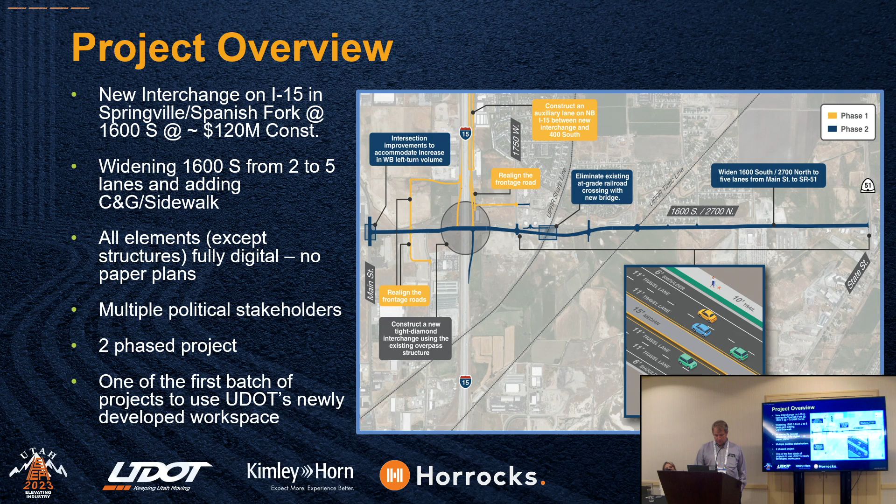So there was a little bit of risk in doing something new on such a big project, with a lot of different stakeholders involved. Let me see if this is going to kick off.

One of the things we implemented on this project was a full digital model. We had RDV Systems put this together for us, and it was very useful. Is this going northbound?

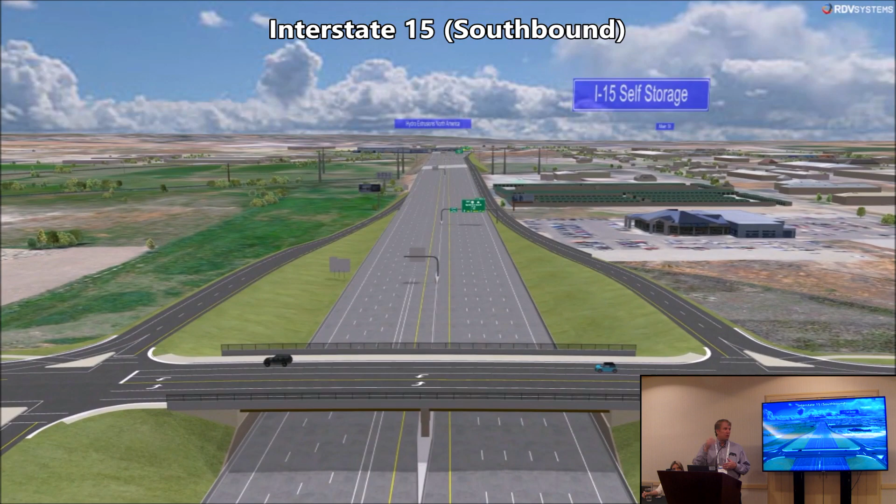There was a pretty well-established nickel arcade over here with a billboard sign. One of the things they wanted to make sure of with the project is that when we relocated the billboard sign, it would still be visible with the ramps and everything. We were able to use this model to take this to the landowner and show them exactly what that billboard would look like from a 3D perspective from the road, and get buy-off on moving that billboard. That was a big deal on this project.

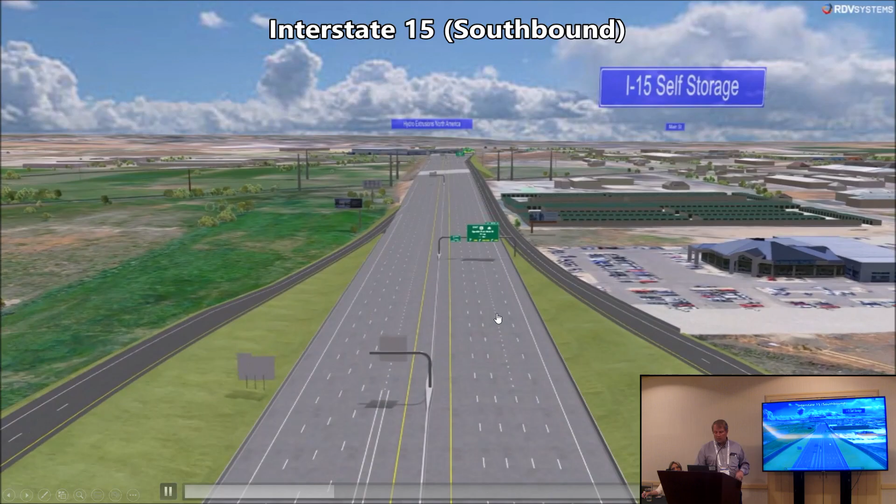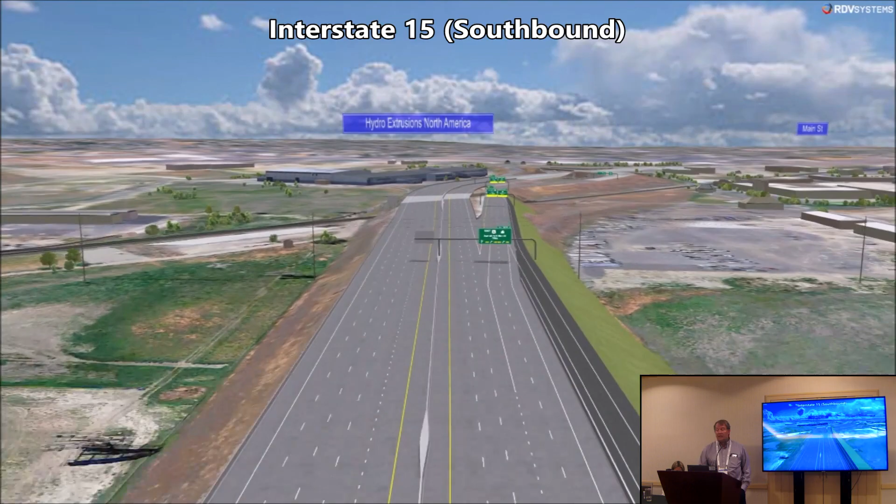We have multiple third parties on this project, lots of utility companies. This corridor has 6 power companies, including the BOR. I don't know if there's another BOR electrical facility in the state. That was a unique challenge in that the BOR didn't even have right-of-way because it was so old that it was prescriptive right-of-way. So one of the challenges was trying to get to move that.

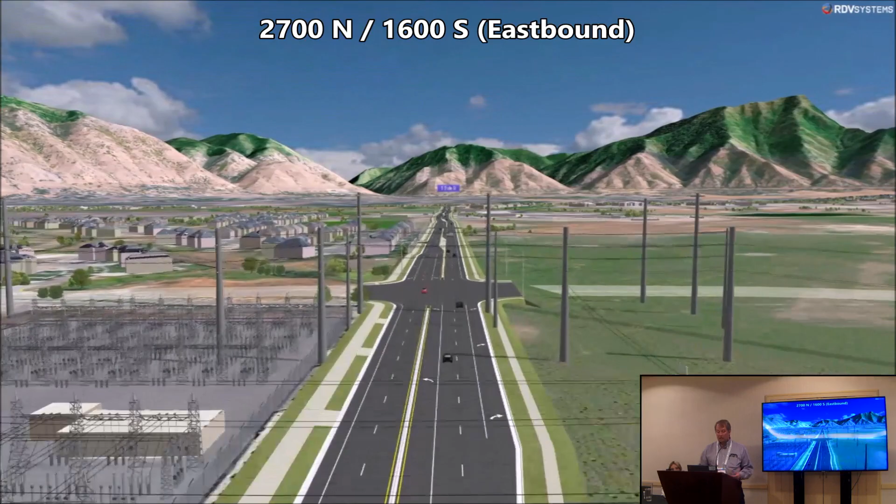So in regards to digital delivery, how do you communicate with all these third parties without plan sets? We're going to be talking about that today. We also had to coordinate with Springville, Spanish Fork, and UTA on this project.

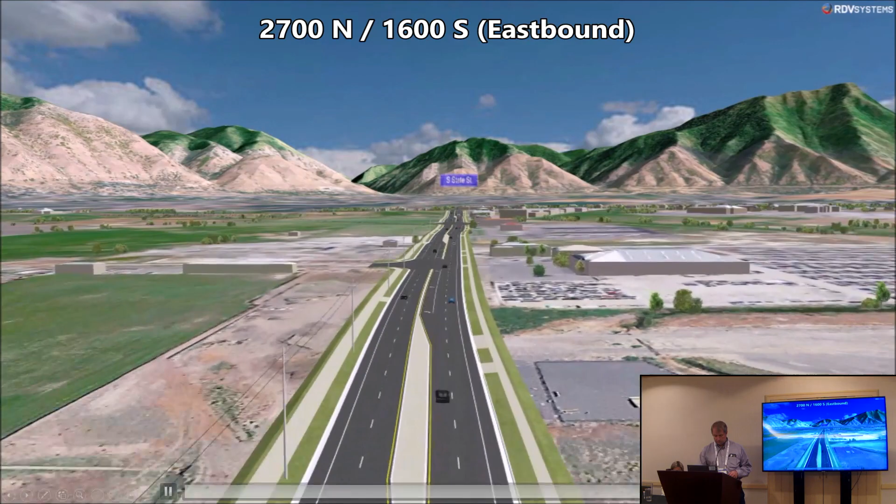One of the important things about this particular digital delivery project is we actually got the UDOT design team involved in doing digital delivery as well, and so they were able to gain experience. With the standards that Ariel and her group and Nicole and her team have put in place, it allowed our team to do a digital delivery project, even though a lot of these teams never had digital delivery experience before. That's one of the unique things on this project, is that it wasn't just comprised of people that already knew digital delivery. There were a lot of newcomers to this process on this project.

Okay, so we're going to jump into some of the unique aspects of this project. This was a hybrid project. What that means is that parts of the project were digital delivery, and some of the parts of the project were traditional delivery.

Because of the unique characteristics of structures, we did the structures plans traditionally. So we created a plan set for structures. All the rest of it we did electronically just through the model.

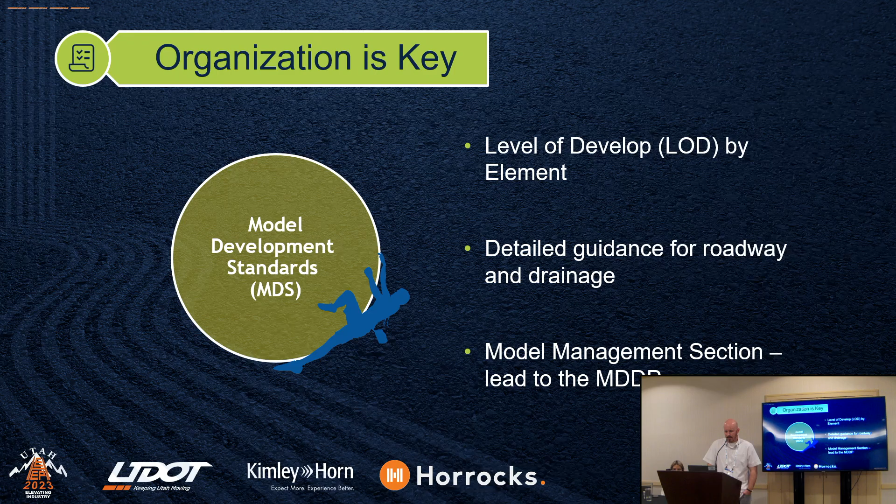And then our model development plan outlined roles and responsibilities, who's doing what, filled out some structure in the organization. We set up some recurring task force meetings specific to digital delivery. The UDOT folks developing this were highly interested in what's working, what's not working on a regular basis. How do we update the workspace for what you need? So they were valuable meetings, just had leads from each team on the project come and report and discuss and coordinate.

I think we were able to track a lot of the feedback, and get a lot of progression and evolution in this process for UDOT through that task force.

Moving on to design details and some of the unique aspects for this project, some challenges we saw. I think with digital delivery, you're going to want to be flexible in what your outcomes are and know who your audience is. That's been a common theme in these meetings.

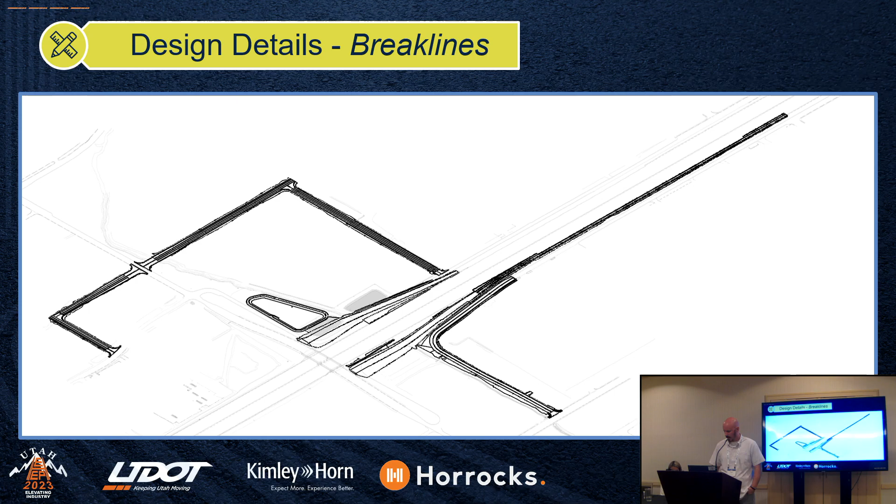The first thing that's helpful with break lines is to standardize your point name conventions for all your break lines. UDOT has a standard for how to name them so that it's familiar for all contractors. Each project, they see the same type of naming convention, and that makes it easy to create your finish grade, subgrade surfaces, whatever you need - just filter by those points. Anything unique to the project, we created a detail to outline what that naming was, so they knew what it represented in their model.

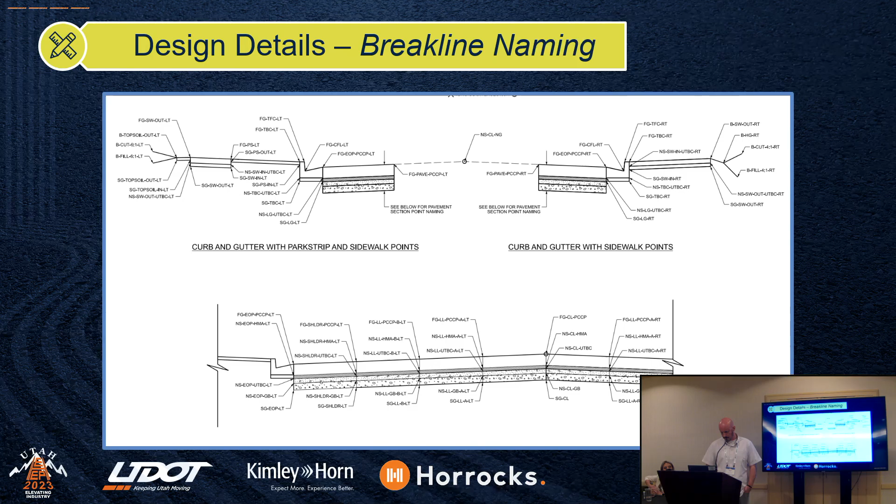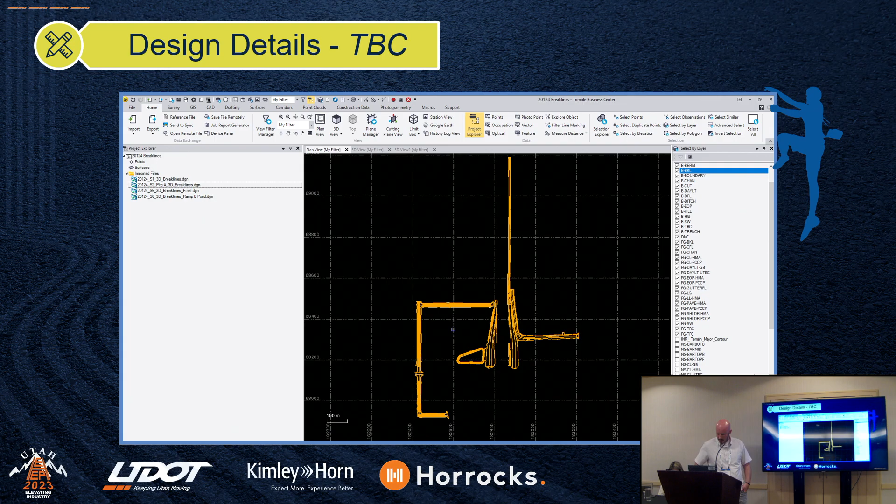Another tool we used is we took our DGN break line files and created terrains, brought them into Trimble Business Center, a tool that most contractors use for their machine guidance. You can see all of the naming for the break lines off to the side, filter them down, and run the report in Trimble Business Center that helps you hone in on gaps and overlaps and fine-tune those break lines to be usable for the contractors. That was a step in our QC to make sure all the loose ends were buttoned up and that the model was pretty tight.

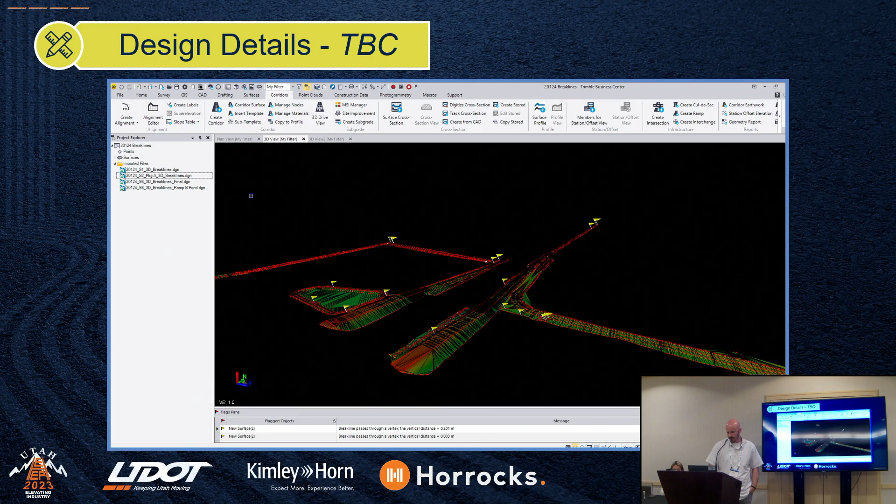So this data is in the element itself. We also annotated it to help contractors if they needed to share it with subs or whoever, to be able to create PDFs quickly or whatever they wanted to use it for. Once the metadata is in these elements, it's easy to query and generate reports and track payment and all that.

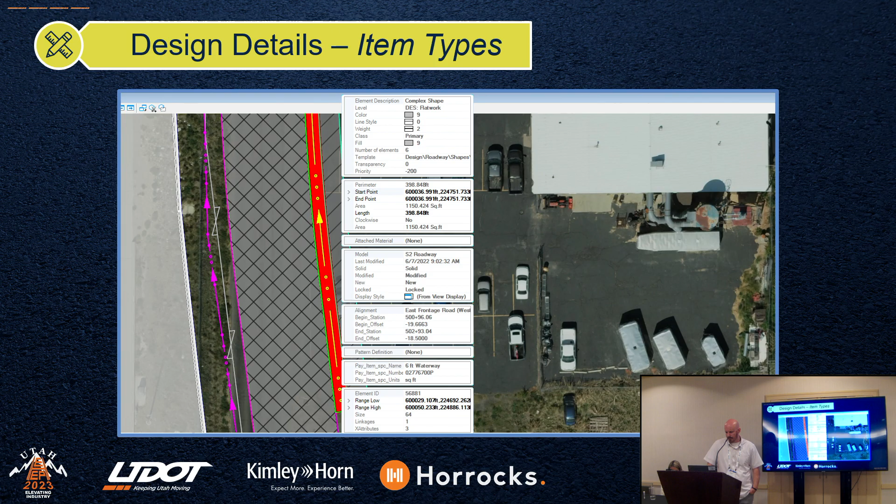Another piece of this that we were trying to anticipate - we broke the project into two phases. The first phase is advertised right now, so we're waiting for bids, and the second phase will go out next year. We were trying to anticipate what our inspection staff is going to need. The contractor's going to have a DGN, they're going to have their model they can use for machine guidance, but how's the contractor, or how's the inspection team, going to verify that it's built correctly?

An example is side treatments. We felt like we would give the inspection team and the contractor, for information only, all of our side treatments to show what the grading and tie-ins needed to look like. So we created those as a PDF for information only.

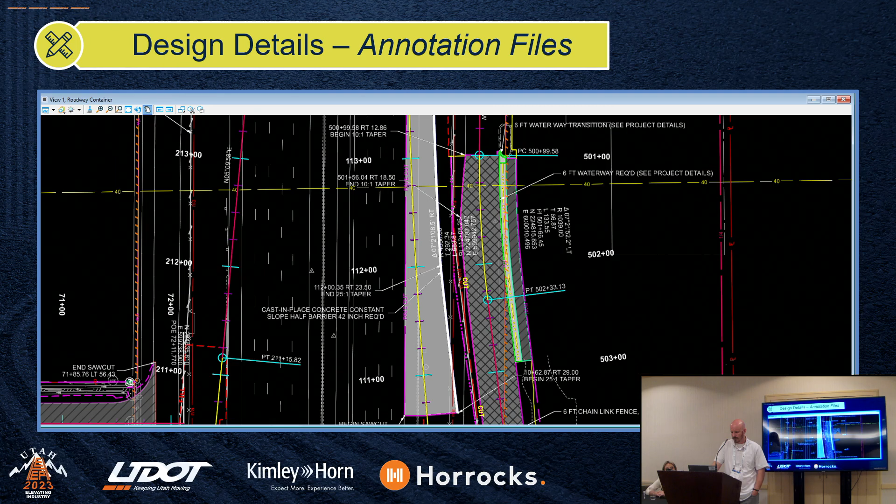Okay, Nicole. Hi. Just want to start out by saying I know it's almost lunchtime. We can make it, we're so close, right?

I'm going to talk a little bit about QCQA and some of the design reviews that we used on this project. If you attended Ali's session before this, some of it will be a little bit redundant, but I'm going to try to focus on the specific project and how we utilized it for this project.

We had a lot of unique opportunities on this project to pilot a lot of things, with Darren being pretty open to giving us a little bit of liberty to try some different things out for UDOT, try some different formats, some different vendor softwares, just to make sure that we were getting the best use and product out of those different things, and also to really just get feedback from the team.

Going back to what both of them talked about earlier, we had several people on this team, including the region oversight, that had never done a digital delivery project. So it was pretty critical for us to get that feedback from somebody who hadn't been in the trenches for years doing this over and over again.

It was a really good opportunity for us to take that feedback and incorporate it back into those guidelines and standards that have been developed over a number of years on the digital delivery website. Through this project, we did have some of that happen, working with Bob and Ariel at UDOT.

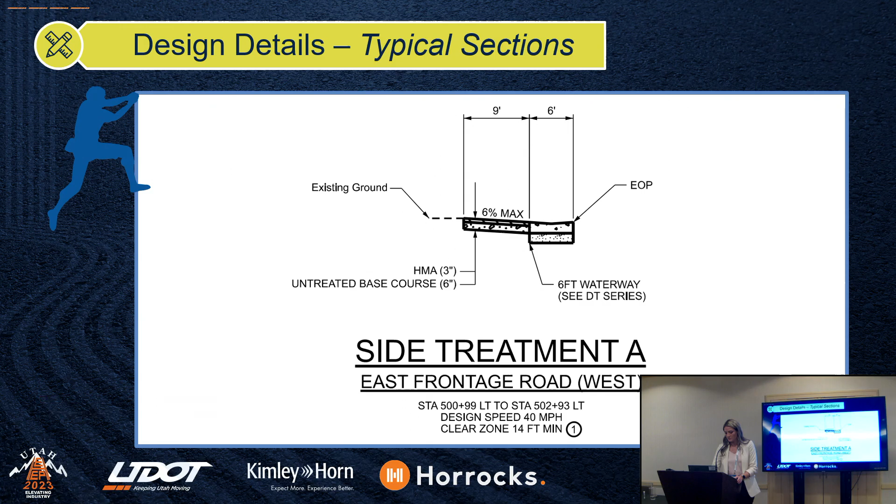We also took UDOT's checklist and developed our own QC checklist with UDOT specific to digital delivery. Each of the designers in their own disciplines had to go through this process where they use these QC checklists that were very specific to digital delivery.

These can be found online, I believe, on the digital delivery website. We had everybody make sure that they filled out these checklists that would then go to the quality auditor. So that was an important part of what we did.

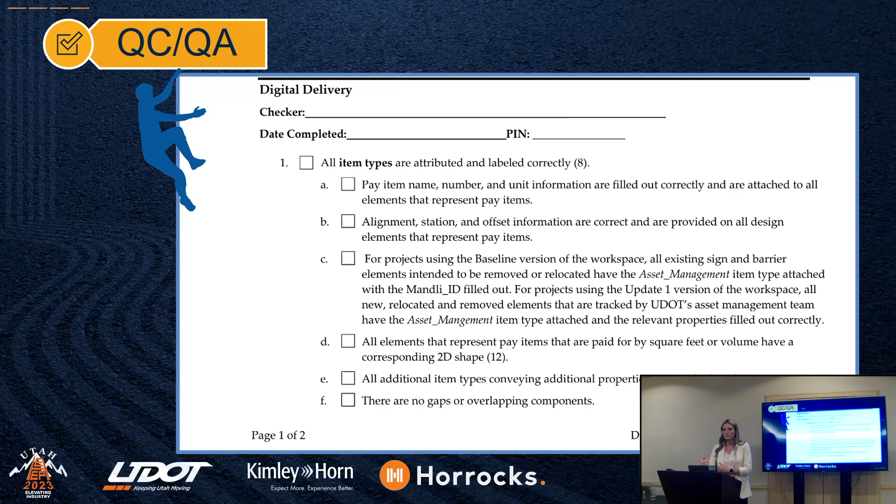Those had to be completed for each discipline, and all the elements within the model had to be QC'd as well. One of the things that was really nice about this is it standardized the QC process. This is documentation that can then be carried forward to prove that quality check and quality control was done on the project.

The other challenge that we had is how do you QC a DGN, right? It's not a piece of paper that you take a highlighter to and color everything out, which, by the way, doesn't always mean it's been QC'd. Sometimes it just means somebody got happy and colored it.

We were trying to come up with how we could emulate that same process in a DGN. So one of the things that we did on this project was work with Bob and Ariel to create item types that actually went through the entire QC process. I believe this was the first project that we actually piloted item types for the QC process on.

So there was a lot of circular feedback in those digital delivery check-ins that we were doing with UDOT to provide feedback. One example was the checker needed to be able to leave a comment, and there wasn't an area for that, so we got that added in.

And then the back checker needed to be able to leave a comment whether or not they agreed or disagreed, in a better way. So there was some back and forth to try to make sure that we were getting everything that we needed to truly feel like we were doing a full quality process.

One of the things that was nice about this is that with item types, you can use filters to turn on and off and color code the different aspects of quality control. So whenever the QCer, whoever's overseeing it, got in there, they could see that three things in this file were missing a quality control check, and then go back to whoever was doing the quality control and make sure that they got in and did it.

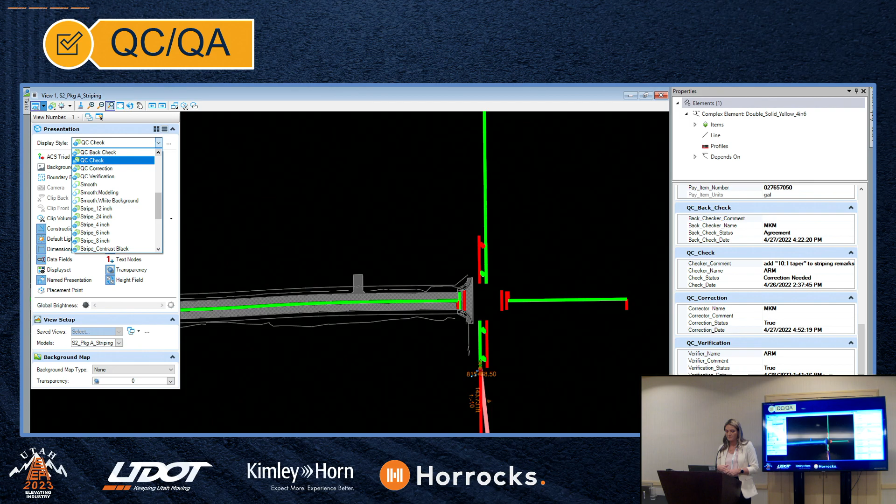And anyway, so there's just a lot of metadata that can be summarized by using these methods, and I just really liked the easy visualization associated with that.

So I'm going to get a little bit into design review, which is different from quality control. I think a lot of times when we say quality control, what I was talking about is the design team actually checking their product before delivery to the client. Once that's happened, hopefully you've caught everything, probably not everything, but hopefully you've caught everything, you feel like you have a really high quality product, and you give that to the client.

At that point, they then need to review your product at each of the milestones, and so we're going to call that design review or oversight. So now that's what I'm talking about now, which is different from quality control, because I know it's got a little bit different nomenclature in every state.

So the way that we did on this project was we actually piloted 2 separate design review software tools. And so what we did with the project, because it does have a lot of political heat to get going on it, is we split it up into 2 phases.

So the first phase is just the ramps earthwork, 2 of the ramps earthwork, as well as a few other things, the frontage roads, because from an MOT phasing standpoint, those needed to be in place before we put the ramps in. And so we went ahead and broke that out into phase 1 to get that out on the street a little bit earlier. It's actually out to bid right now, currently. So we'll see how that goes.

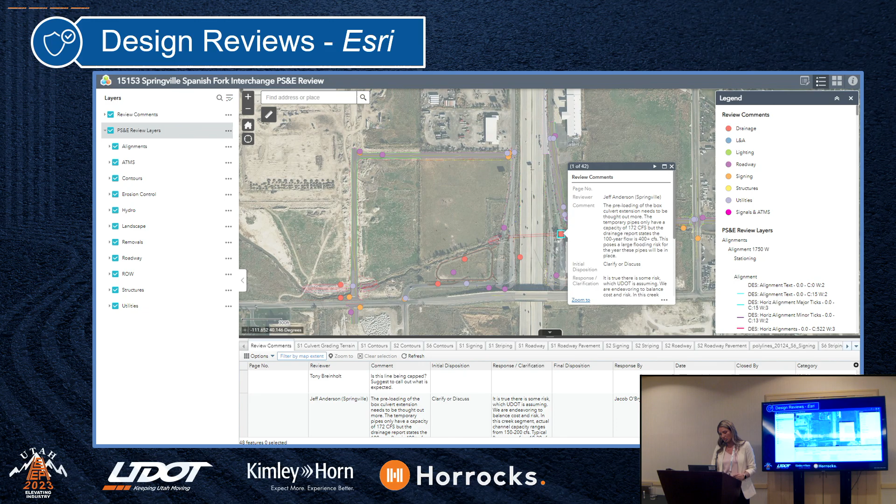On the next phase, we decided to shake it up, as if we didn't have enough complexities. So we were like, all right, let's do something different. And so we decided to do Bentley's iTwin review tool. And so with this one, it was a little bit different.

Instead of converting it from CAD to GIS like the last tool, we actually had to create iModels, and then we had to create saved views within those, similar to what we did with the disciplines on Esri. We had to create saved views that were discipline specific to allow people to very quickly access their data on what they're trying to review. So we did a saved view for each discipline, and they were able to click on that discipline save view, and then all of the levels were turned on for that discipline. In that manner, it was pretty easy for them to navigate into doing that. So that was a little bit different process to get there.

Some of the challenges that we had is that we did have to add individual users and manage that team within Bentley software. So making sure we had the appropriate amount of security and appropriate people on the list, and getting them access took a little bit of time to get set up, which I think was totally manageable, but that was just an element that we had to deal with whenever setting up this tool.

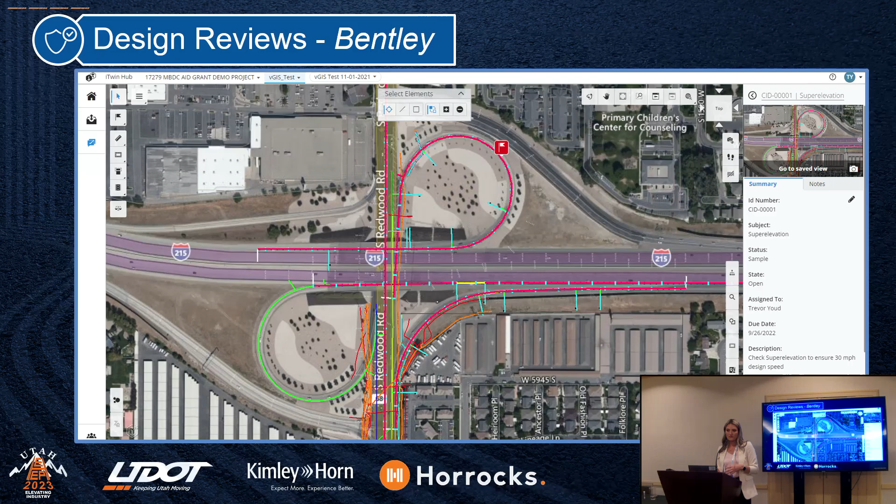So as if we haven't piloted enough, I got a few more for you. One of the things we did on this project that I'm really excited about is that we used RDVs to not only develop the 3D visualization for us - they did a fly-through video, but also an interactive platform where we could jump in and look around from anywhere on the project, including the front door of a property owner or whatnot. They were able to take our 3D model and actually run an algorithm that analyzed stopping sight distance at any point on any lane on our project.

So one of the things we wanted to make sure we looked into, to alleviate those concerns and also to reduce risk and liability, was we took a look at this and actually analyzed it for the design speed and stopping sight distance on every single travel lane. That way we could bring that back and say, as you can see, these places meet stopping sight distance for every single travel lane. It was just a really good gut check to make sure we weren't just looking at something along alignment and calling it good, but actually visually being able to see, no, we're good. So that was a really cool tool that we were able to pilot on this.

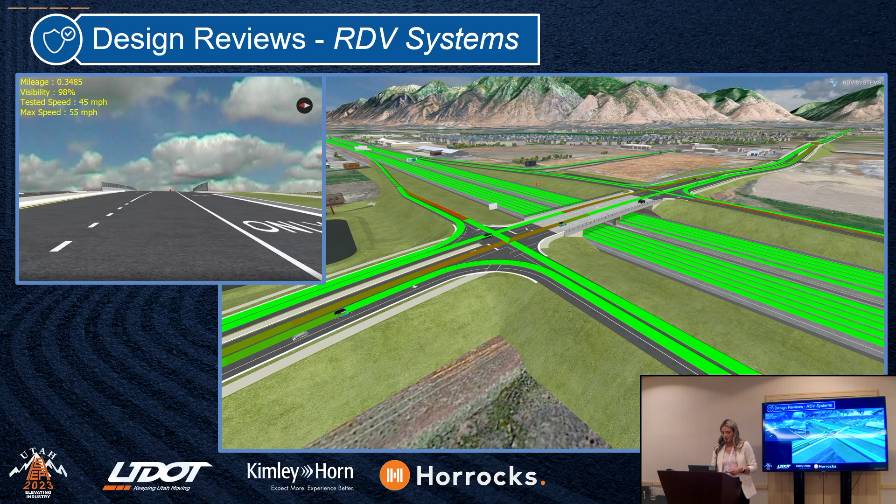Another thing that we piloted is the use of blockchain for signing and sealing our project - a lot of firsts on this project. It was really exciting because as a PE, I get a little bit nervous about just signing a memo with my stamp on it and saying my files are good to go, because those files can change, right? And even if you're able to lock them down or give them a date and time stamp, that date and time stamp can be changed very easily with simply Googling how to change a date and time stamp.

Yeah, you can download those.

As a PE, when I first heard about Modelo, I was very excited about the fact that there was something that could actually lock it down and give it a fingerprint, so to speak. We worked with Terry and his group, and when we first put this together, it was really awesome because they were able to sit in and provide over-the-shoulder feedback and interactions with their team to make this go seamlessly.

I was the one that put all of these together for the entire project. We had 19 signers on this project for all the different disciplines, and you saw how many organizations we had involved in that. To have that many people all contributing, I think we had 120 files, give or take, maybe more. Okay, maybe it was 190.